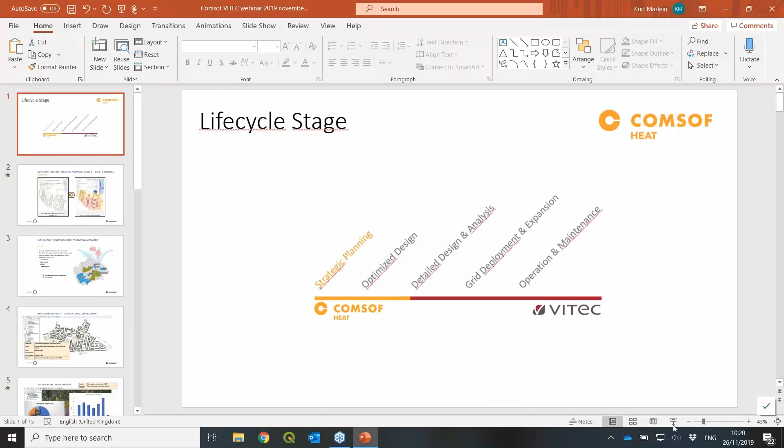Okay, good morning, Johan. Thank you very much for the introduction. The audio from my side listening to you was not so very well. I hope this time is better now. I hope everybody can hear me clearly.

So let me start now with the first part, the strategic planning phase. What does Comsof Heat do? Well, we have software for the automated planning and design of district heating networks, and our software is GIS integrated. We're using QGIS, but also other tools are supported. For example, ArcGIS is also supported as another GIS tool.

The space heating demand and the sanitary hot water heating demands can be derived, for example, from yearly gas consumptions. But of course, this is very specific to the area, to the location, depending on the age of the buildings, the level of insulation. So that is something that the user of the tool would have to provide specifically for his area. When this information is available, you can provide a set of technical and financial parameters via a graphical user interface to specify how you want to design your network.

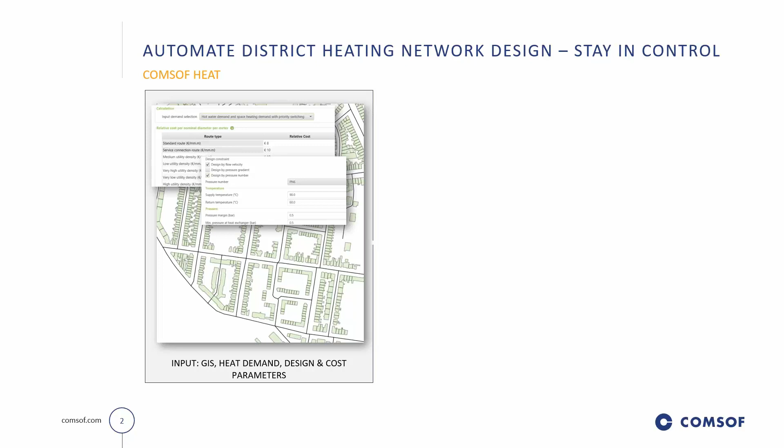Scaling factors can be set on street by street level, and this will also be taken into account later on when the algorithms start routing the network, because we will try to optimize the cost by selecting the cheapest routes to interconnect all buildings with the sources. So the streets with high scaling factor will be avoided as much as possible, while the cheaper routes will be favored during the routing. So what do I mean with routing?

So the clustering, the routing, the pipe sizing is fully automated. Of course, you stay in control, you still have possibilities to fine-tune, to change parameters, to change sizes of clusters, to group in a different fashion, and also the clusters can be manually redrawn if you want to select more or less buildings in a cluster or group them in a different manner.

So next to the technical design, we also generate a bill of material with the full overview of all the pipes which are required in the system, service connections, distribution pipelines and transport pipelines, with the exact length and cost per meter for your networks to give you an estimated budget for the network deployment. So this is the principle of the tool, and in the next slides I will show an example case.

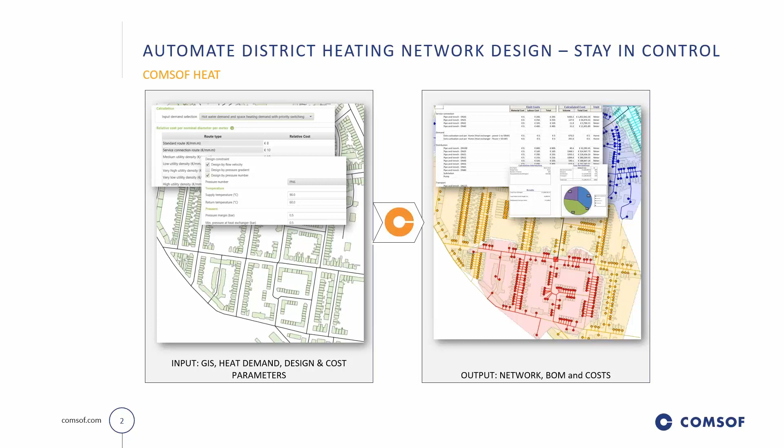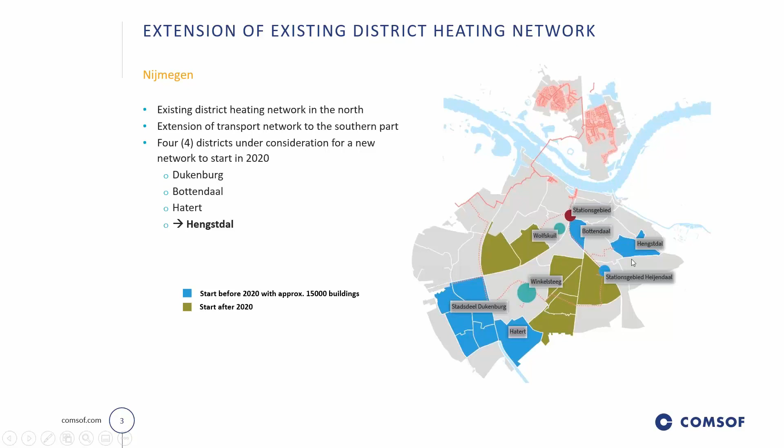Here we have the city of Nijmegen in the Netherlands. They currently have a district heating network in the north of the city, and they are now investigating to deploy multiple extensions in the south of the city. The blue areas are under investigation because they have higher priority, and we're now going to look at this district here, Hengstdal, with about 2,400 connections and about 3,700 homes. So also here, the space heating peak demands have been derived from the yearly gas consumption on street level.

So this is a screenshot here of our software integrated in QGIS. We have the source here in the northern part of the city. In fact, it is a connection to a bigger transport line which is passing there. And all the dots are in fact the endpoints of the pipelines.

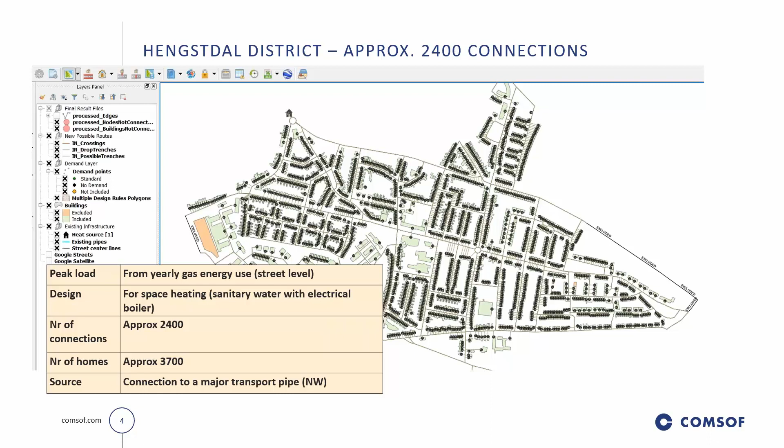So what you see now on the screen could be a possible result of a design. We have 14 energy centers of maximum 1 megawatt, and the small red squares here that we see are the distribution substations, which are then interconnected with the black lines. The black lines are transport pipelines interconnecting to the source connection at the north. Automatically generated, clustered based on the technical input parameters, and a design like this can take less than 10 minutes for this size of network.

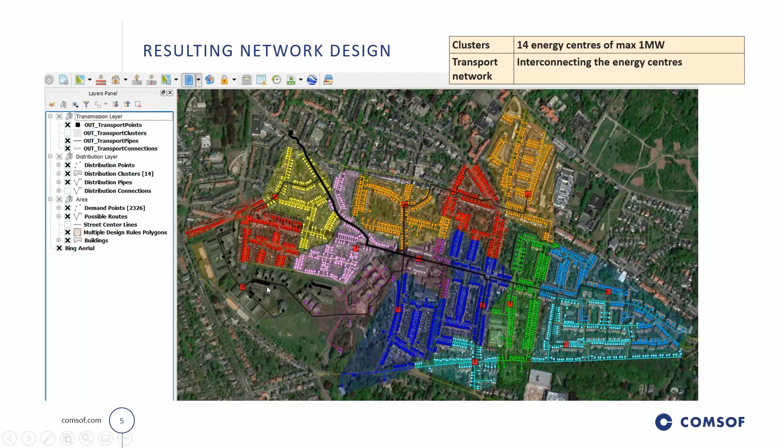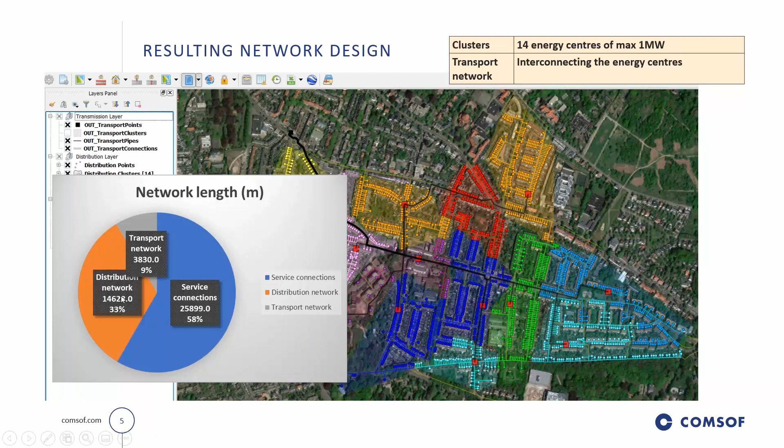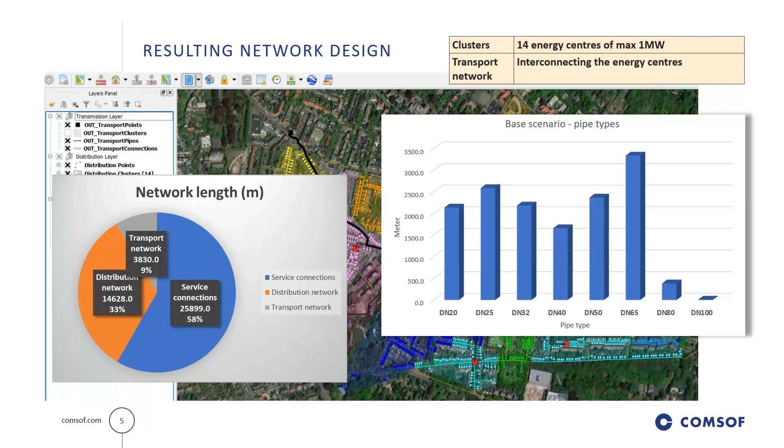What we see here is the ratio of the length of the different pipes. We have the service connections, the transport pipeline, and the distribution network with their lengths. Here we see the division of the distribution pipes by type and length, which come automatically out of the bill of material.

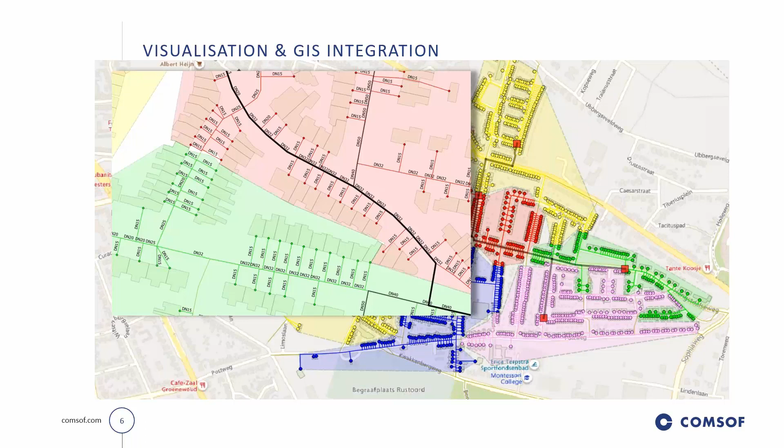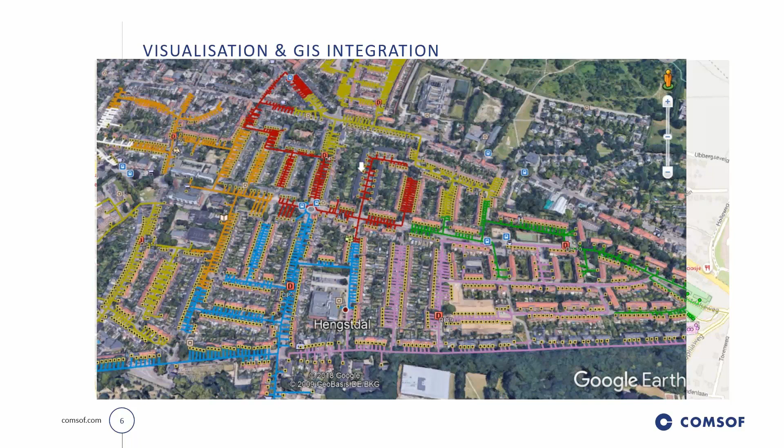There's a possibility to visualize the network in Google Earth to give you a first field survey without really going to the location. You can go deeper and zoom into street view, or even further down at street level to visualize where the pipes would have to be installed for this network.

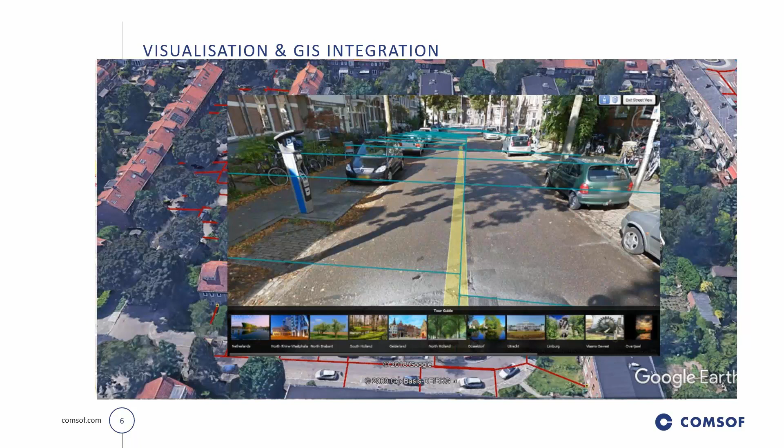So the first step gives you a high level estimate of the cost of your deployment, but you still have the option to further optimize your design. If we look at this figure, these are the different steps in the process.

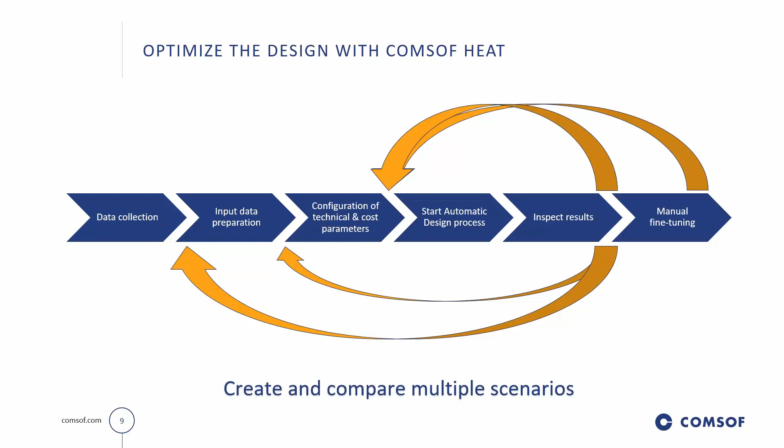Once the result has been completed, you have different ways to create and compare multiple scenarios. You can take a step back, go back to the input data preparation and change data there, or change technical parameters and cost parameters and run multiple simulations for comparison.

If we apply this principle on the same districts, we're going to investigate scenarios of lower heat demand compared to the base scenario. So we calculate a few additional scenarios with 10%, 20% or 50% less space heating demand, and look at the effect on the network cost.

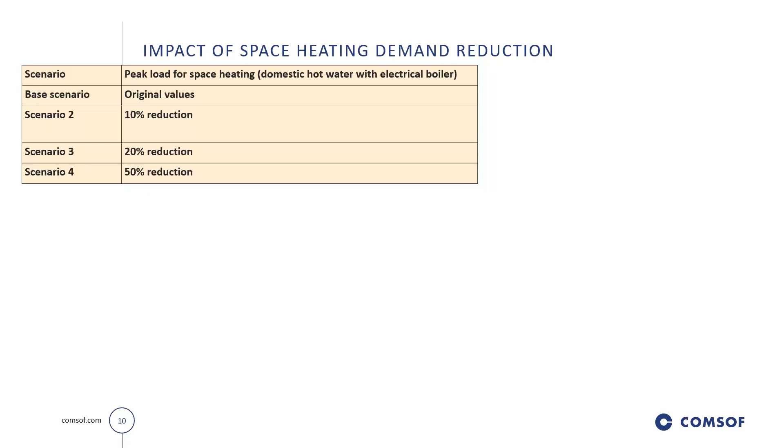What we see here on the picture is a design with 50% heat demand reduction. Here we have 9 clusters of 1 megawatt instead of the 14 clusters for the base scenario. The clusters are also bigger, of course.

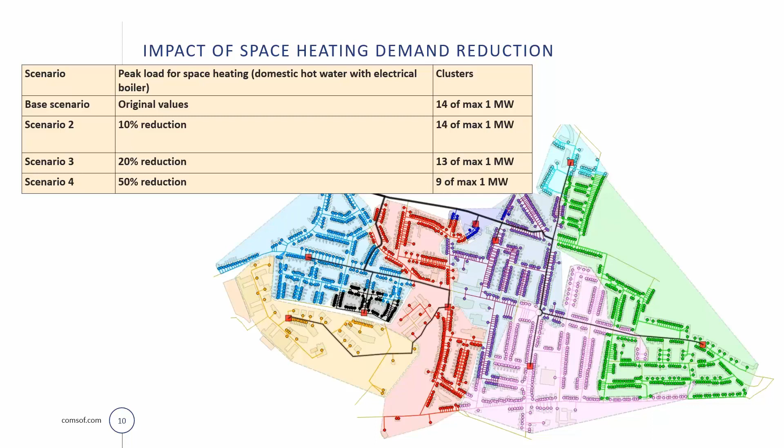When we look at the distribution of the pipelines, we see there are a higher number of smaller diameter pipes and correspondingly fewer pipes of larger diameters.

Of course, there's also a cost reduction. If you look at the cost reduction in the situation with 50% heat demand reduction, it's about 8-9%. So it's not proportional with the heat demand reduction.

That can be explained by the fact that the trenching cost is quite dominating here. We have a large network with a lot of trenching to do, and whether you open up the street to install a pipe of 60 millimeters or a pipe of 40 millimeters, there will be a reduction in cost for the material, but the overall cost is highly determined by the installation works, the civil works, and will be fully dominated by the trenching cost.

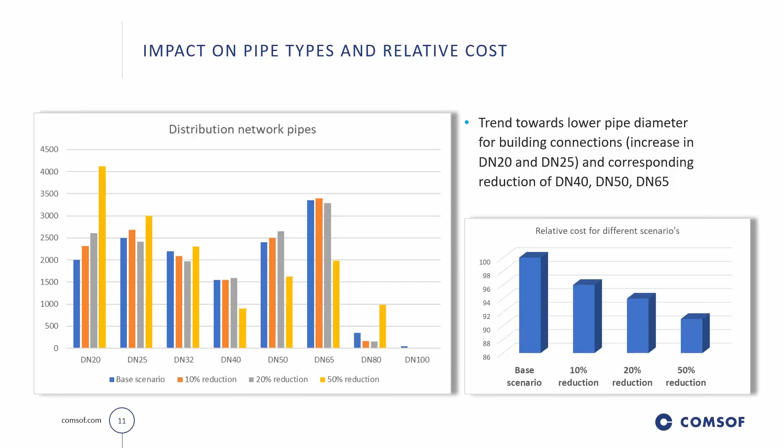So that's a bit the conclusion we can give here: the trenching cost is really the main driver for this type of network deployment.

As I mentioned, you can easily create additional multiple scenarios. In this case, let's say 15 to 20 minutes maximum, depending on the situation.

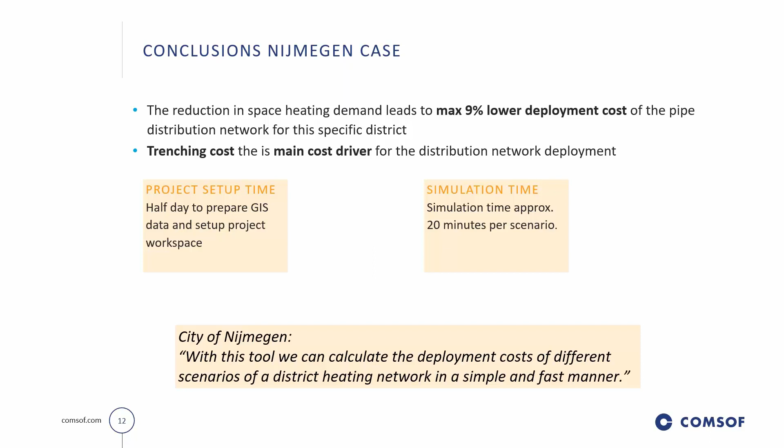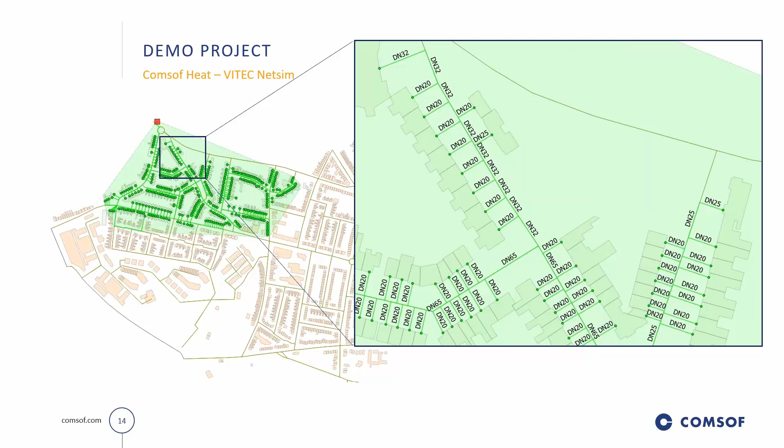Thank you very much. Yes, thank you, Kurt. Go over to the other Johan here as well. Can we see your screen now? Yes, we can, so go ahead. Thank you, Kurt, and thank you, Johan.

And now we're back to the Vitec side of things. We will be showing some things in our software NetSim, a grid simulation software. The first step, as Kurt mentioned, is how to import things from Comsof over to the Vitec side.

So we start with just getting the data over from one side to the other. As we said, we will be working with one of these districts. It's of course possible to import the grid with all the different sections, but for this session we will look at one of these sections to make it easier to get an overview of what's happening.

For the import, there are shapefiles exported from the Comsof side of things, and this is also what we will be using on the NetSim side to import things. So we'll use these shapefiles generated by Comsof Heat of the grid to import these pipes into our software NetSim.

And we can also import the consumption data from this side. We have a pretty easy interface for this. You can either do it yourself as a client, or you can ask us to do this import for you, depending on what you prefer.

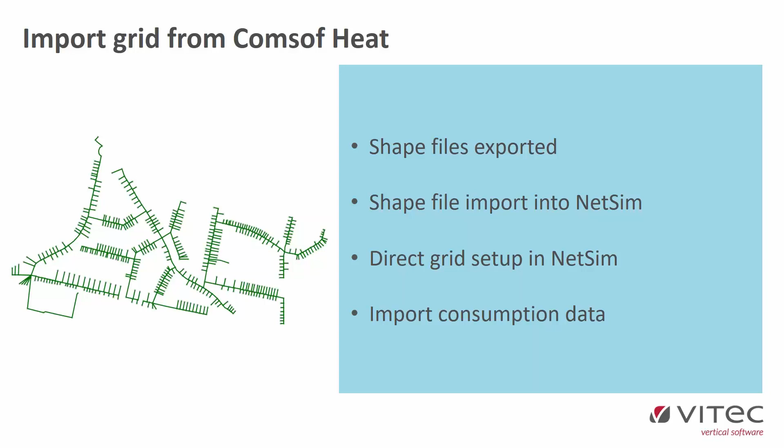After the import is done, we have a few settings we need to do on the NetSim side. We get the pipes and the heating demands in from Comsof. But we need to set up our production plant, and in this case, this is the energy center from this cluster. We also need to specify the temperatures, the supply temperature, and either a return temperature or a cooling delta T on these nodes.

We also need to have a pressure maintenance because we need to know the pressures in our grid, both the static pressure and the differential pressure, so we know what we are working with. When we have done this, we are ready for calculations on our side. So it's a very fast way to get from one software to the other.

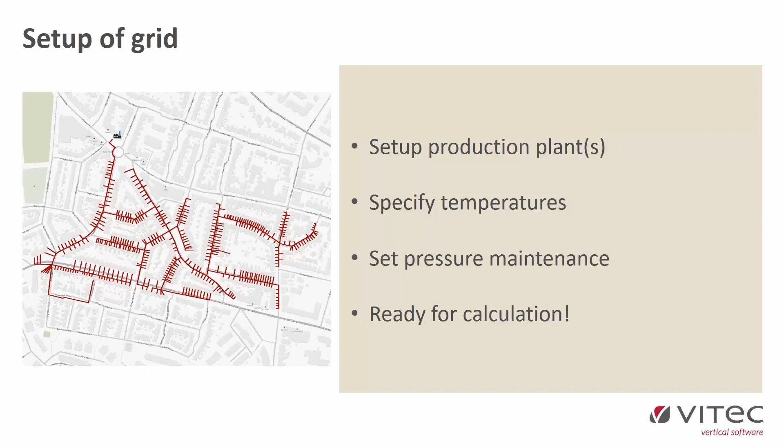So now we will continue on to the detailed design and analysis of the system, and we'll start with looking just at the interface for NetSim. This is the interface where you can change things on our side.

Here we get the data from Comsof Heat. Everything is input here, and we can now change things on our side if we want to. So if you want to change the heat loads, or if you want to change the size of some pipe or so on to see what will happen, you can do it.

You can also easily draw pipes manually in NetSim. So if you want to add some pipes to see what would happen if it was drawn in a different way, or just to see if you can add some extra consumption at a later stage, it's really easy to do that as well.

After we have done this setup, we can continue to some analyzing of the results. These analyses can be done in a few different ways. We'll start with the graphical one.

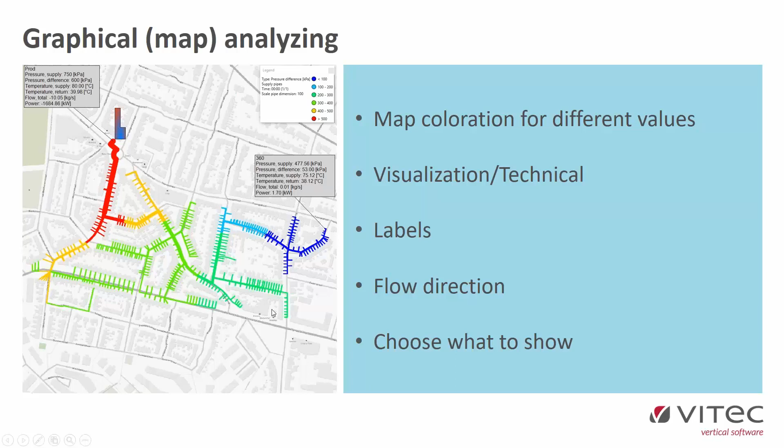We can also choose to show the flow direction. In this case, there are no loops in this grid, so it will not be too interesting, but if you have a more complicated grid with some loops, the flow direction can be of interest. So we'll have just arrows showing the direction that the water is taking through the grid.

I also have a different set of labels. In this case, I have them on the pipes instead of on the nodes as I had before. So instead of having the production plant, I have the pipe going out from the production.

So we can see the diameter of the pipe. We can see how much we lose in pressure per meter, the speed and the flow of this water. Again, this is something you can choose to add or remove information, so you only see what you're interested in for each specific case.

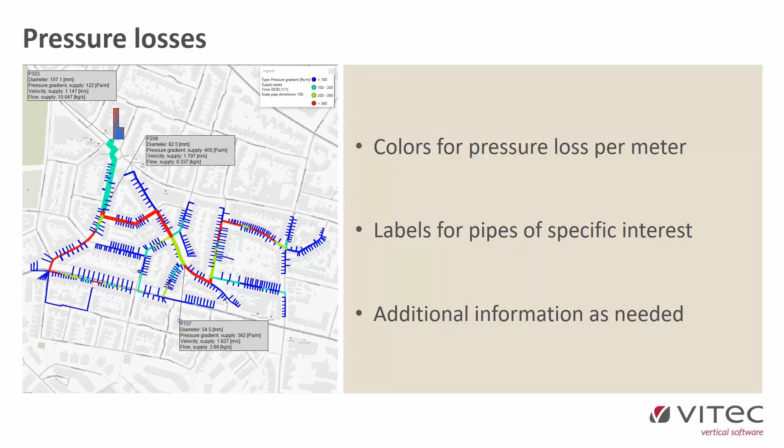We can also show pressure graphs of our grid. To do this, we need to select a route, basically specifying which part of the grid we want to see this pressure graph for. And these graphs can show pressure, as we see here.

We have a pressure graph. We can also show temperatures if we want to, and this includes height changes. We can choose to show pressure in two different ways. Right now we choose to show the pressure losses, not including the height in these pressures, but we can also choose to show the absolute pressure to include the heights. So it's up to you what you want to see.

This is a more traditional pressure graph, and we can also see the height changes included here, so we see how the height changes throughout our grid. And we can also show cavitational pressure, so if you want to make sure you're not close to any cavitation in some pipes, you can choose to include the graph for that here as well.

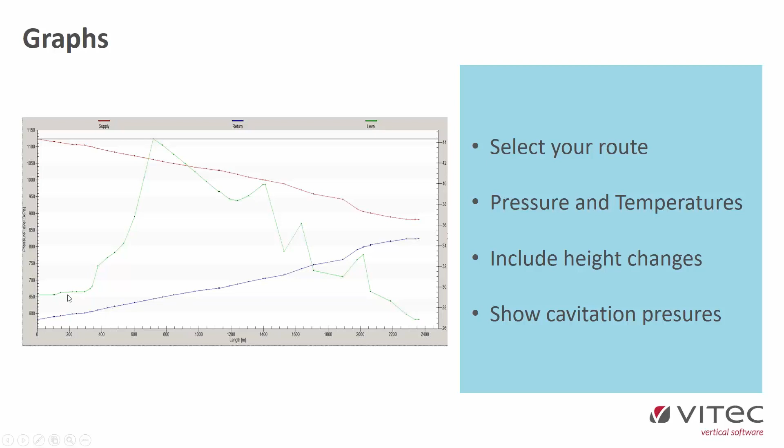And you also get all the information in tables. If you prefer to work with numbers instead of visuals or graphics, that's fine. All our results are available in numbers as well, so you can see all the information here.

You can sort and filter in our system, so sorting on what you want or filtering it. We also have a connection to the map, so you can right-click in our tables to find that point in the map, so it will mark it and zoom into it in the map.

And also when you're in the map, you can do the same thing, select an object in the map to get it marked in the table, so you can find all the information you want about it in table form as well. We also have easy copy and paste from this to Excel or other features if you want to continue working with the results in some way, or if you want to make extra graphs or other functions. You can easily copy and paste it to any software of your choice.

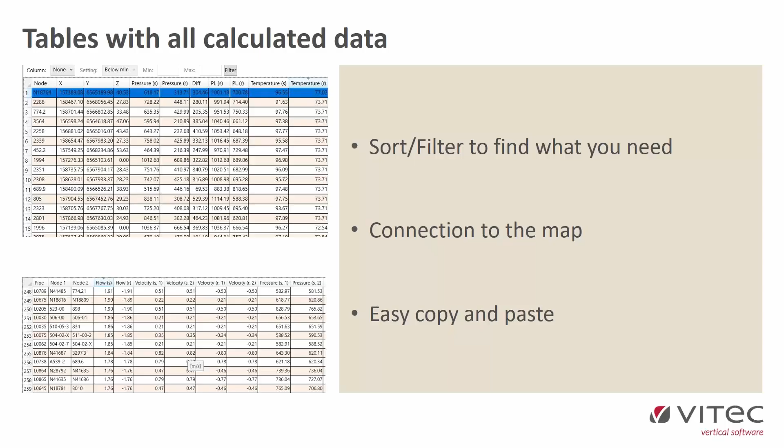And then we're back to the design phase, and what I want to say here is basically that we can adapt to the results. So after you've made the calculation, you can of course go back and change things in your grid. Let's say that we thought the pressure in this part was a bit low. In this case, we could have added a pump, made a new calculation, and seen what would happen.

You can also make other changes such as changing the pipe sizes, changing consumption, and so on. You can calculate this again and get the new results and compare them. This is of course an iterative process. You can do it as many times as you want and need, to see how the changes impact what you want and what you need to do to get to the end result you are looking for.

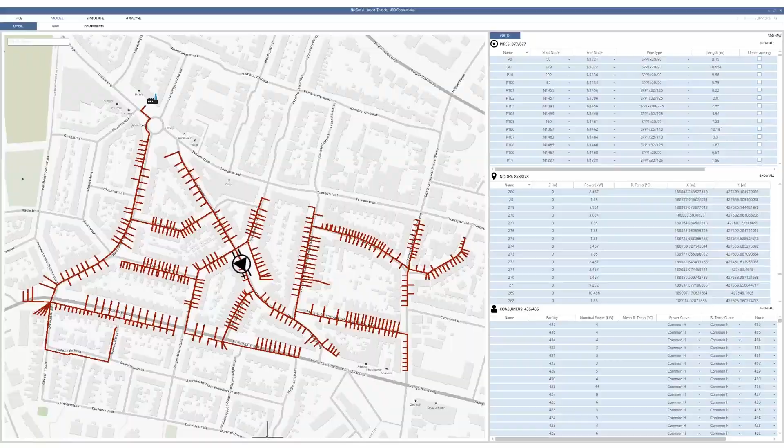So now we'll move on to the next part. I've grouped together a bit the grid deployment and expansion, and operation and maintenance of a grid. So what will happen basically when we are done with the design and the grid is actually starting to form, or is actually in place.

So what we want to do first is update values to represent our reality. When we go from Comsof, we get some values which are either measured, guessed, or estimated. So we get some rough values of what's going on, but when we actually deploy our grid, we usually get a bit of a different set of numbers. In this case, as you see, the power has changed a bit, but also the return temperature has changed. In the case we're talking about, we actually measure the power, so maybe it won't change much, but the return temperature we actually don't know how it will work out until we have the grid in place.

So we can easily update this to represent the reality we have. We can import data, either from building systems to just update the consumption and the return temperatures, but we can of course also import GIS data if you want to. Let's say you actually build the design from Comsof - the pipes might not be exactly in the same places, so you might want to have the data included. Or if you're not coming from Comsof, if you already have a grid that is deployed, we can also work from GIS data to set up the grid.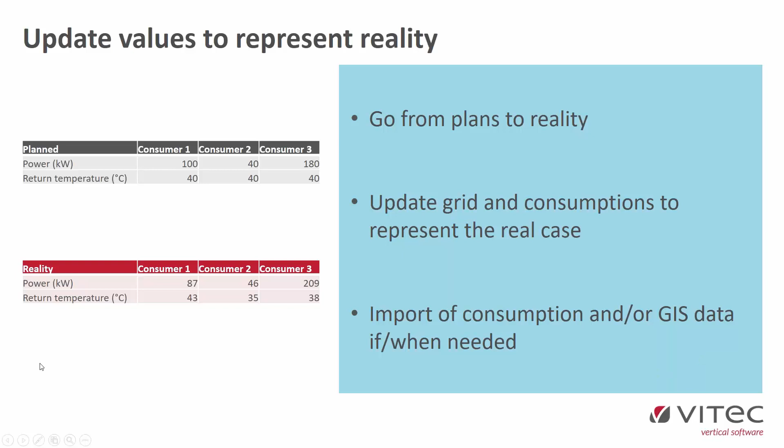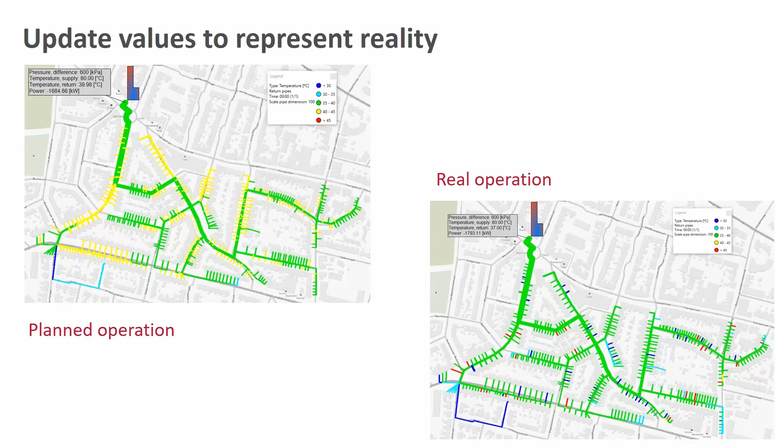And we can also work with different load cases. So what we've been doing so far is working with peak loads, and then we can of course change this to work with other loads as well. And we can evaluate operating conditions for different things. And this, for example, would let us see what will happen with the grid in the summer, to see how we should operate the pumps, what temperatures we should use, and so on, to get a good working condition during the summer as well, or other lower load case scenarios.

And NetSim also lets you change fast between these load cases. We can adapt to changes according to outdoor temperature. So we can set, for example, fixed supply temperatures that are dependent on the outdoor temperature. Both the return temperature and the heat load of each consumer can be connected to the outdoor temperature. So you can either group them to easily change all at once, or you can change them individually if they react differently to changing temperatures.

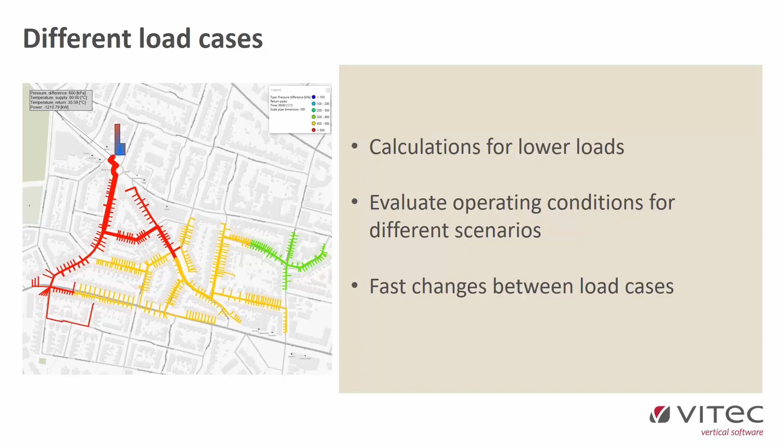If you change the supply temperature, what will happen in your grid? If you increase it, how long will it take to have an impact, and what happens during the transition from one supply temperature to another? Also, if you have some problems and get cold water into the grid, how will it spread through the grid, and how long does it take to recover from that? We also can see the travel time in the grid. So if you send out some temperature from the plant, how long will it take to reach the different consumers, and when will it impact them?